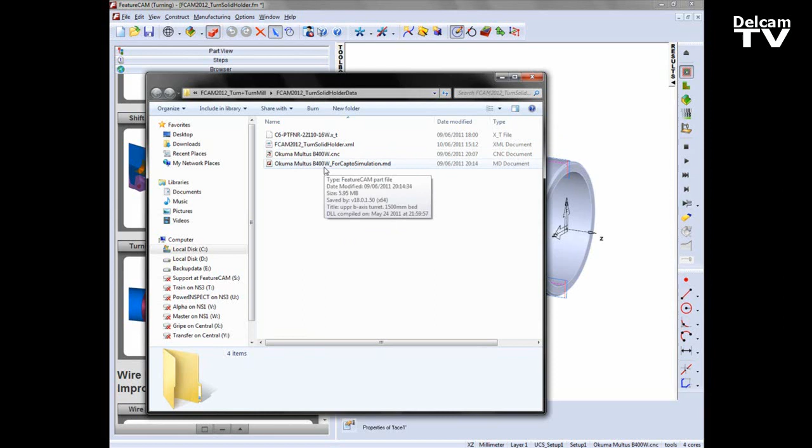You'll notice in the rolling demo window we have a folder icon. If we open that folder icon, you'll see that we have a Parasolid file for the holder. We also have the pre-saved tool crib, which has the tools currently saved in the part, and we also have the Okuma Multus CNC file and a special MD file that is set up in this case for our Sandvik Capto tooling.

What I'm going to do for the time being is turn off the groove and cut-off operations. We're going to create the tool for the facing, turning and boring operations.

Running a 3D simulation, you'll notice that's the turning shape so far.

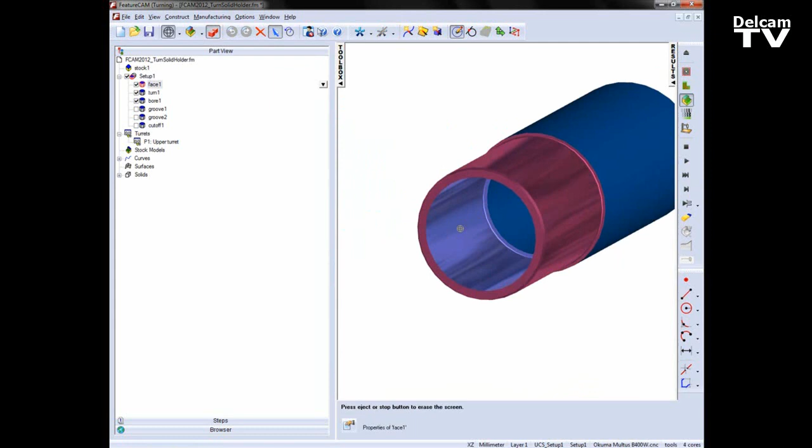So what I'm going to do is go up to my options, into the simulation, and turn on show holder.

What you'll now see is the variation of different holders and different inserts that are being used for the various operations.

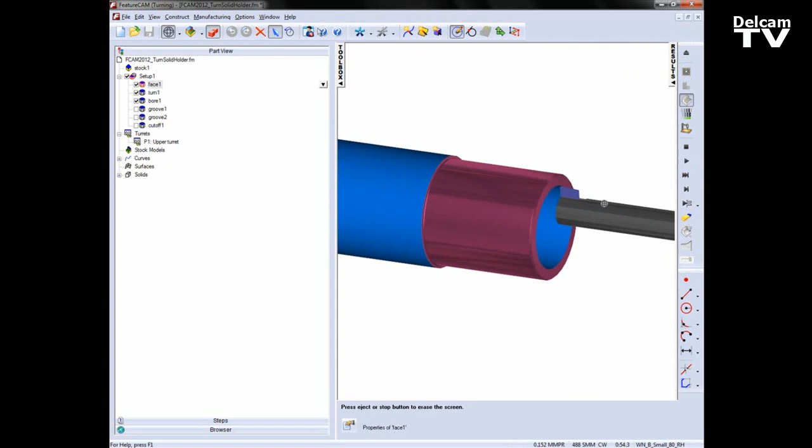So now we can see we have the boring bar. This could all be done with one particular holder, so we're going to change the holder that we're using.

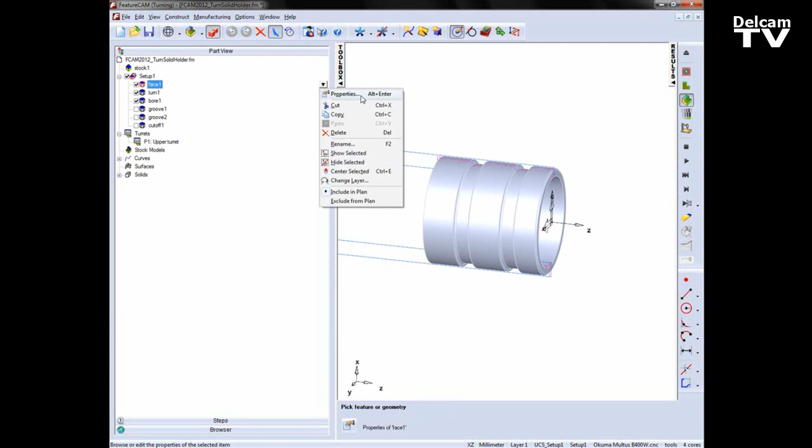The first thing I want to do is go into my facing operation, into the properties. Under the Finish tab, you'll notice that we're using a small turn 80-degree insert tool.

What I'm going to do is create a copy of this tool, and we're going to call this TNGA, and then we're going to signify a tip radius of 0.8 of a millimeter and 16 millimeter for an inscribed circle diameter. I'm going to change this to be a millimeters tool, change the insert type to be a triangle insert, and fill in the values.

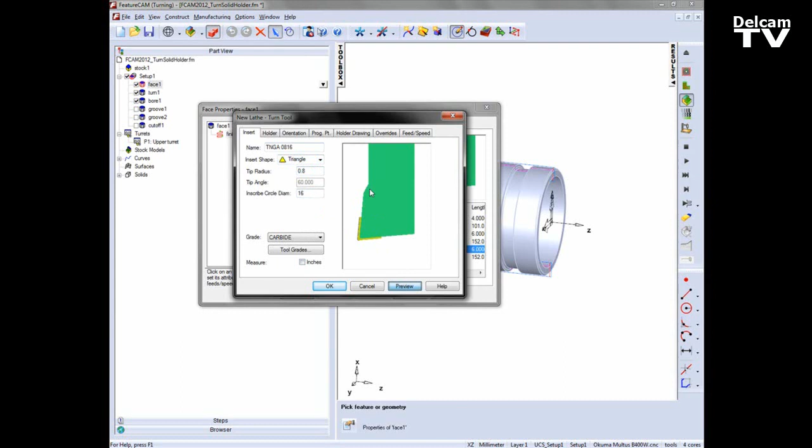A preview will update the view, and you'll notice that we also need to change the holder geometry. So I'm going to go into the holder geometry and set the values: 3 degrees for our side angle.

We're going to set a shaft width of 32. We're going to set a length of 130 millimeters, an exposed length of 110 millimeters, and a distance from the tip to back of 22 millimeters.

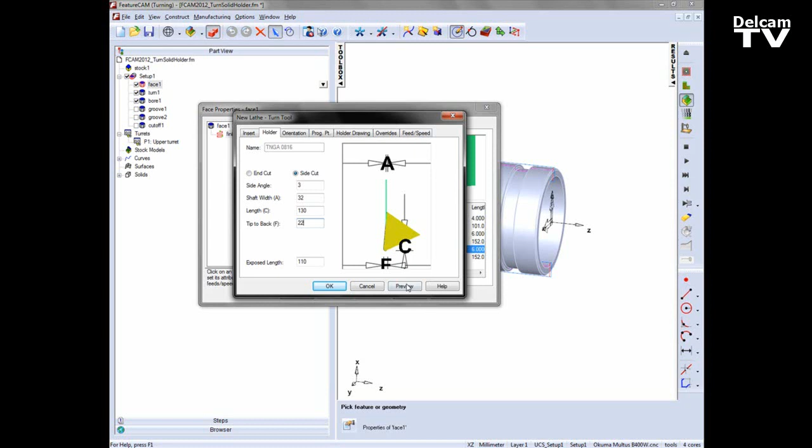So at the moment we have our holder geometry, and we're also going to change just the direction of cut. In this case, this is an end cutting tool, not a side cut.

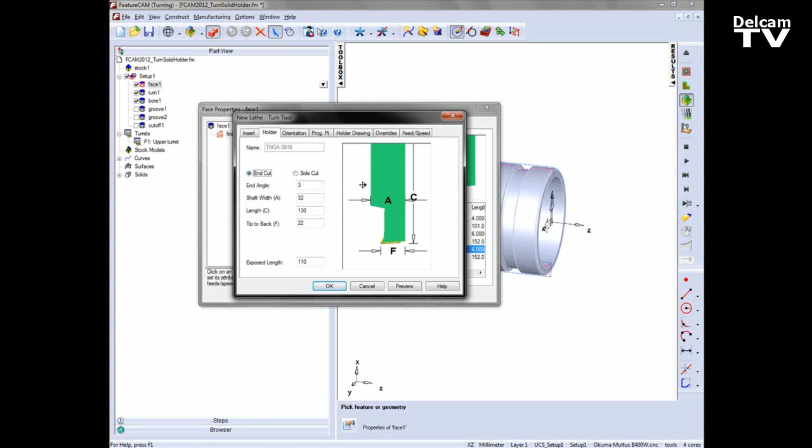So this is our tool saved so far. We can say OK, allow the programming point to reset, and set the tool as override. This is the tool we're going to work with, so let's apply.

So now I need to bring in my holder geometry. In this case I'm going to import the solid from that folder location. Going back to the browser, clicking on the folder icon, you'll notice I have a Parasolid file for a C6 PTFNR. I'm going to drag and drop straight into the FeatureCAM window.

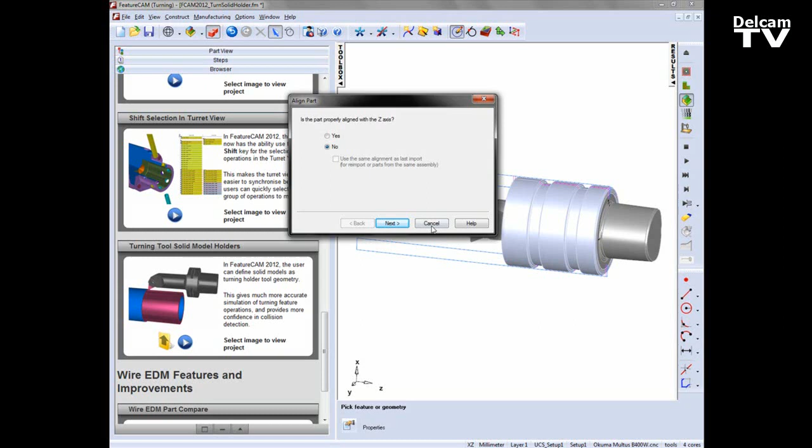I'm going to import, but I'm not going to go through the wizard. I'm just going to simply cancel. You'll now notice that I have my new solid here in the window.

I can rename this if I wish to do so, again calling this C6-PTFNR.

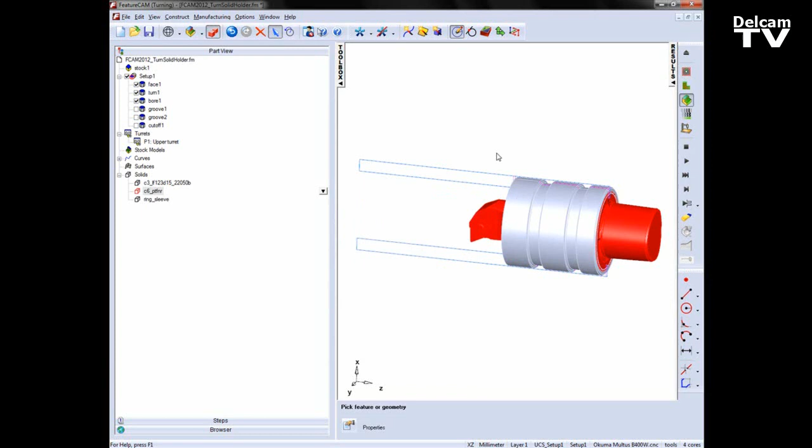So that's my solid holder. I'm going to hide everything except that solid holder, and viewing from the top you'll notice that we have the insert position located around here.

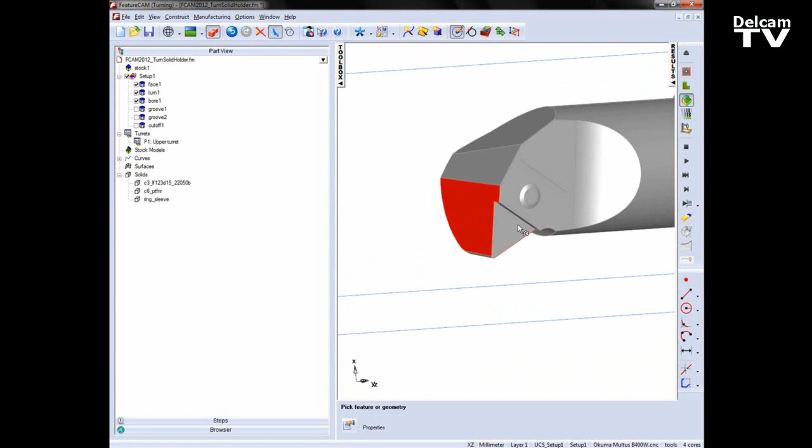So what we need to do is take a sketch and find the mounting point or the zero point of this holder. So again I'm going to hide everything except these two faces.

I'm going to create some sketch lines simply between the key points. So I now have my line geometry. I can hide those faces, and then I can use the trim extend just to pull my lines so that they cross each other.

And then I can clip. So that gives me my point to move the holder geometry.

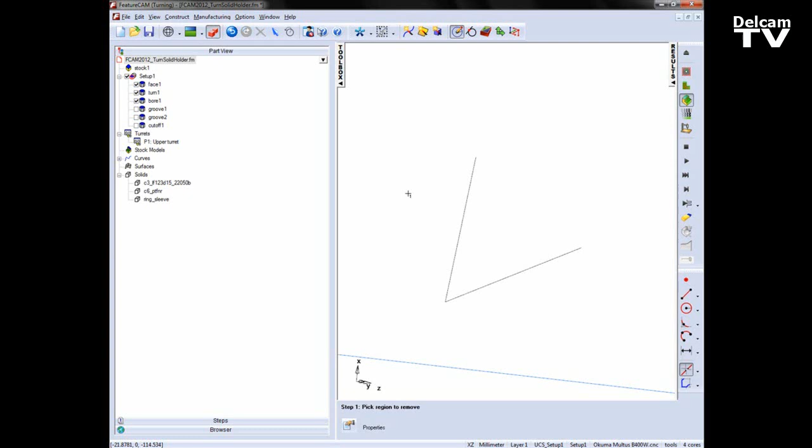So let's say show selected, bring that tool back. Now I need a reference point to move this to. In this case, I'm going to go back into the facing operation, into the properties, into the finishing tab, and under the tool I'm going to go to the holder drawing area. You'll notice that we have a new option for curve or solid.

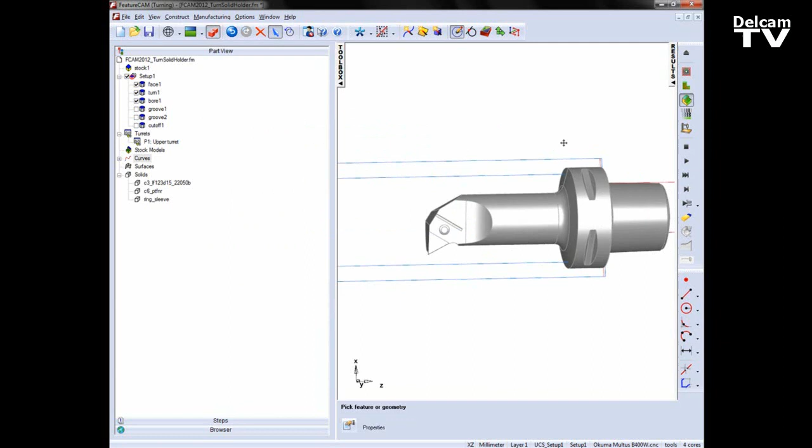So to give me my reference point, I'm going to use the curve and simply paste an example of the curve into my FeatureCAM window and cancel. You'll now notice, if I turn the shading off, you'll see my insert position and my holder geometry.

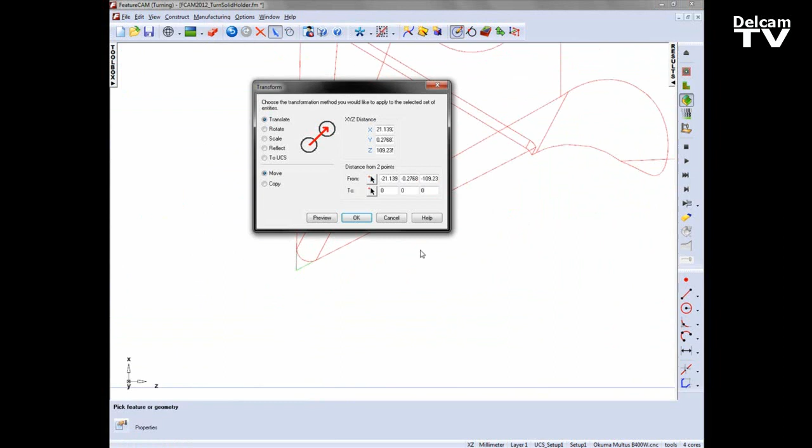So all I'm going to do is select my holder. I'm going to provide a transform, just simply going from my corner point position there, and simply going to, in this case, the location of a holder position. So I can snap to that key location. Preview the holder position. Everything looks okay, so I can accept.

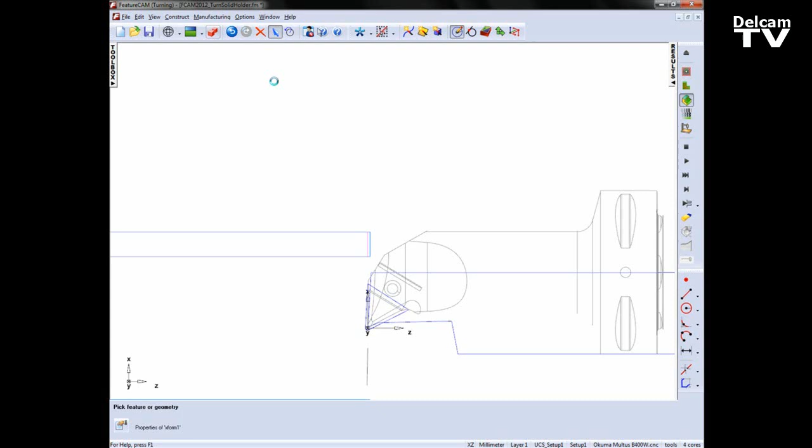Turn the shading back on. You'll now see the position of the insert relative to our holder geometry. These curves can now be deleted.

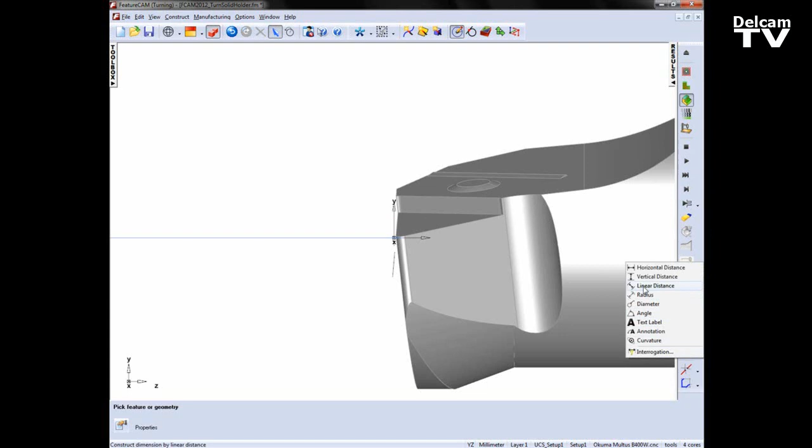Looking from the side here, you'll also notice that we have a step distance where the recess of the insert will sit. So I'm going to take a measurement of this, just simply taking a linear distance between two key points, and you can see we've got approximately 2 millimeters. So for the sake of simulation, we're going to simply move the holder down the y-axis by 2 millimeters.

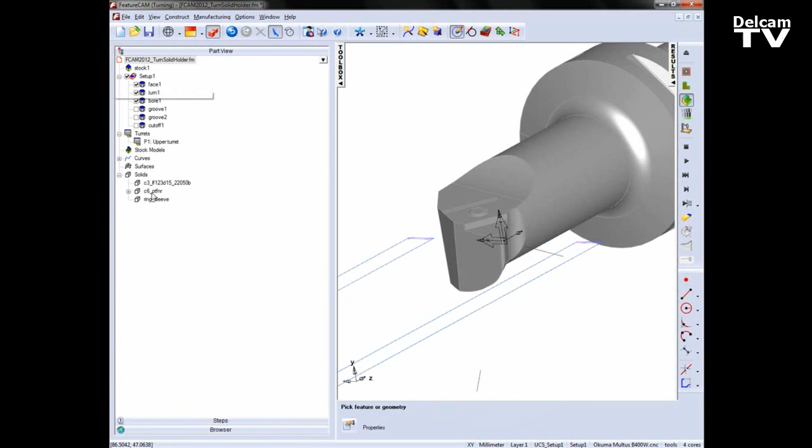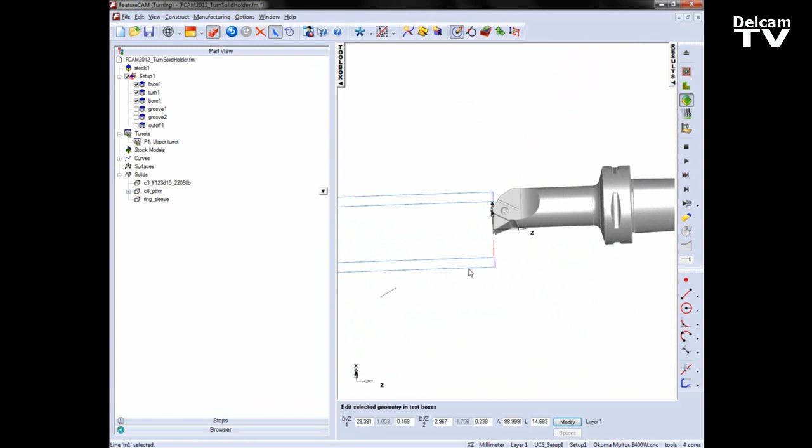So again, another transform, this time selecting the solid again, into the transform. I'm going to simply set 0, moving down the y-axis, -2, 0. Okay. The wireframe geometry that I used before can now be deleted, and I now have my holder position correctly orientated, ready to combine in the tool.

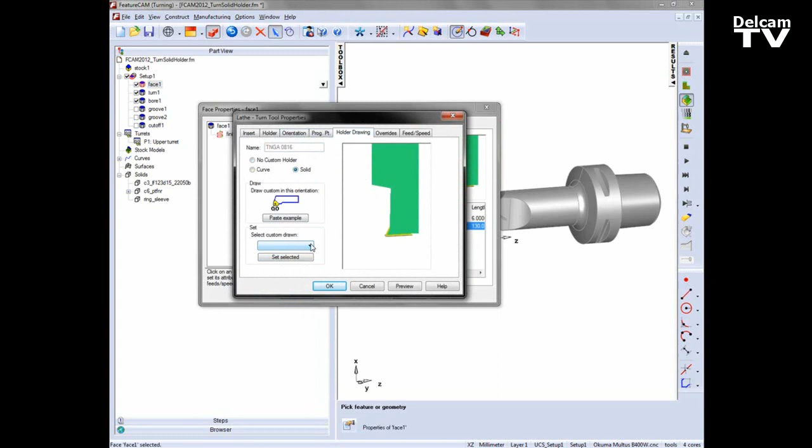So let's go back to that facing operation, into the finishing tab. I'm going to select my insert. Under holder drawing, I'm going to select solid this time, and you'll notice that this becomes populated, and I can choose my solid. In this case, I'm going to select that C6 and choose set selected. You'll notice that the preview window shows the insert position and the holder geometry.

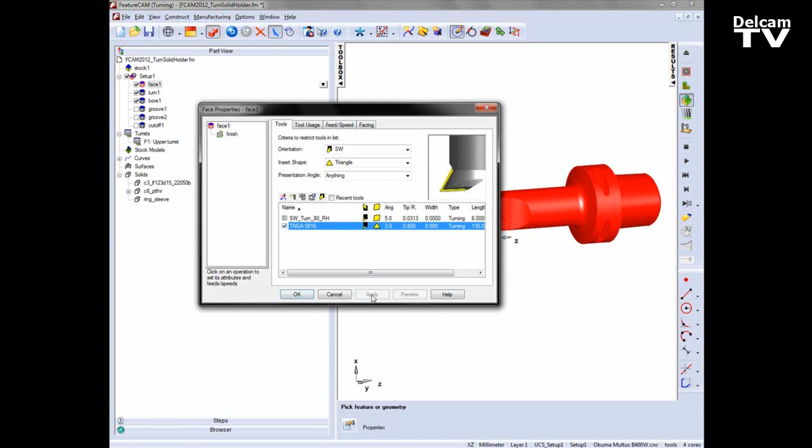I can now accept that, and this tool is now updated and used for my facing operation. So I can now choose to hide this. I'm going to show the ring sleeve. Running a centerline simulation, you'll notice that I now have my tool holder geometry.

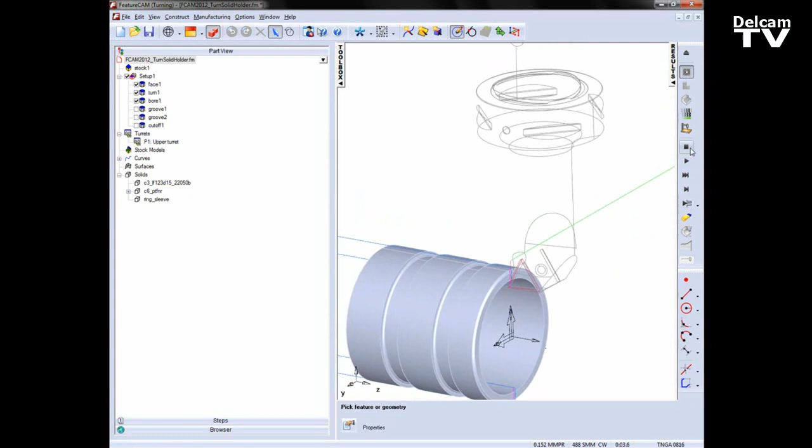Because of the orientation of this tool, or the type of tool, this Capto type tooling, I can also use it for some of the other operations that I have in the tree. So I'm simply going to select all these operations and override with that tool.

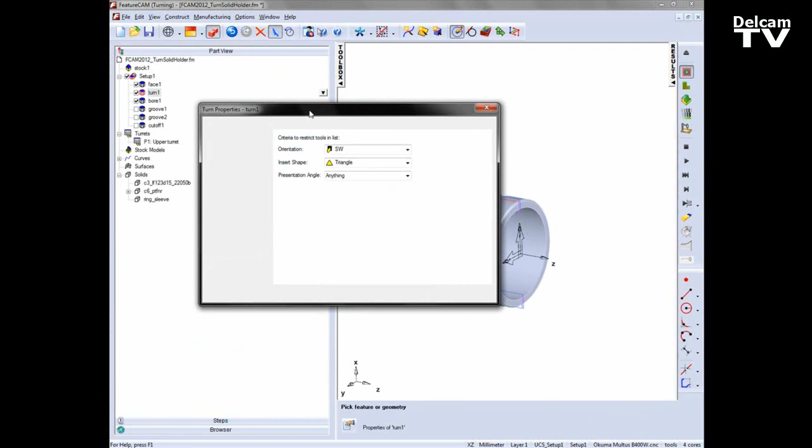I now need to orientate the B-axis for this Multus machine to position the tool correctly. So in the turn operation, I'm going to select the roughing tab. Notice the direction of the tool at the moment. I want to be cutting with this end here. So I'm going to set the B-axis orientation, orientate it as if it was a boring bar, but facing west-south. Apply, and again you'll see the update.

Repeat this process for the finishing. And we also need to do a similar operation for the boring. So into the roughing tab, into the B-axis options, ID boring bar, but this time west-north. And again repeating for the finish.

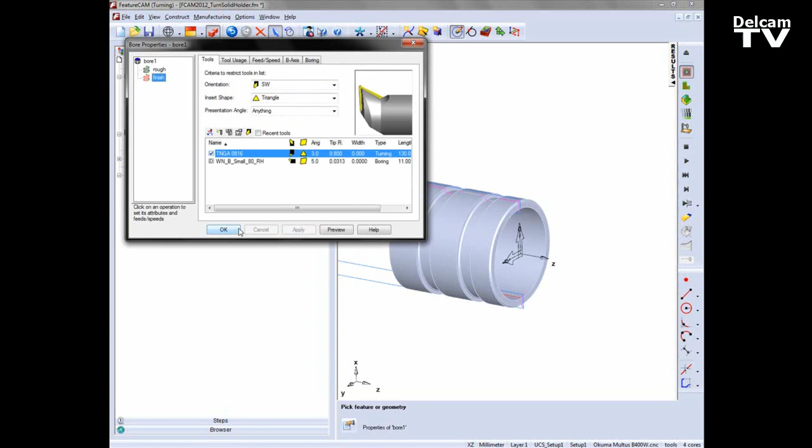Our tool is now orientated correctly. We can also turn on the grooving operations, which in this case are using a C3 type holder. So those have already been done for you.

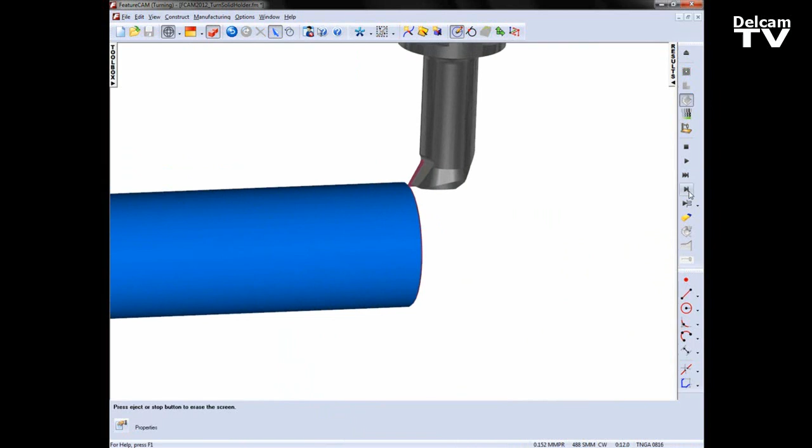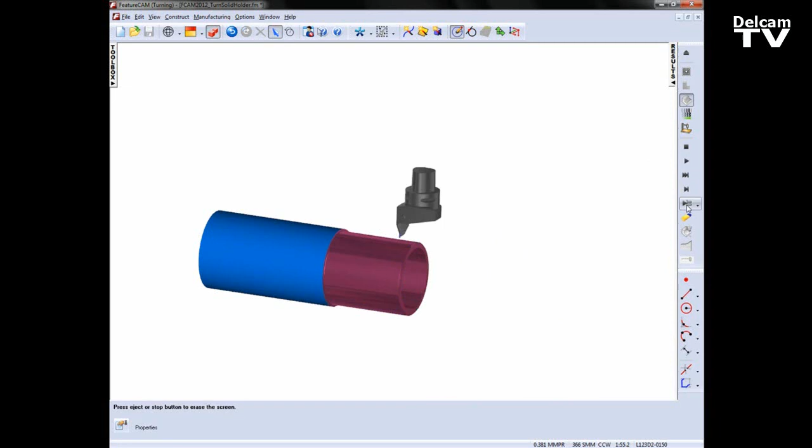We can now run through our simulation, initially as a 3D operation. So there is my facing. Tool then indexes round, and we can start cutting the outside turn. And again index round and cut the bore operation. There is also the grooving tool, which allows us to groove the two groove areas, and this tool can also be used for the cutoff.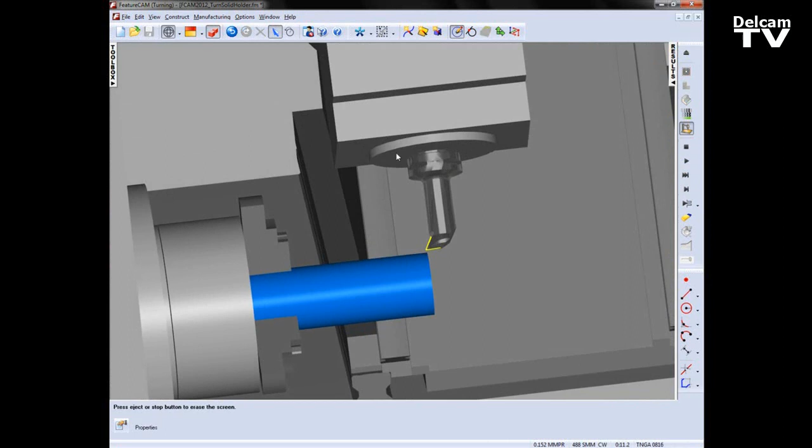So the final thing to show is the machine simulation. In this case we have this Okuma Multus, and it's been specifically designed for the Capto type tooling. Let's run that a bit slower, just to verify. The part's complete.